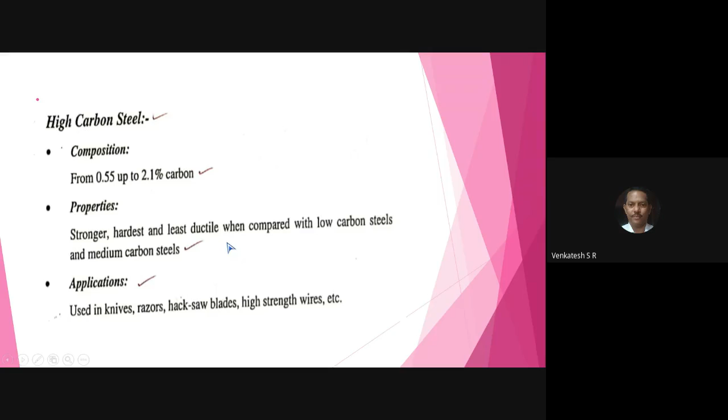Properties of chromium nickel steel. For that reason, write down properties: stronger, harder, stability, and low thermal expansion. Good weldability, corrosion resistant, corrosion resistance.

Next, write down number 3, applications. Used in axles. All of you have seen the bottom of the truck or lorry, a shaft running from the engine to the back wheel - that's the axle. Nowadays in Volvo buses they call it a multi-axle bus, because of that the shock and vibration is very less. If you use more than one axle in the truck, the shock and vibration are less.

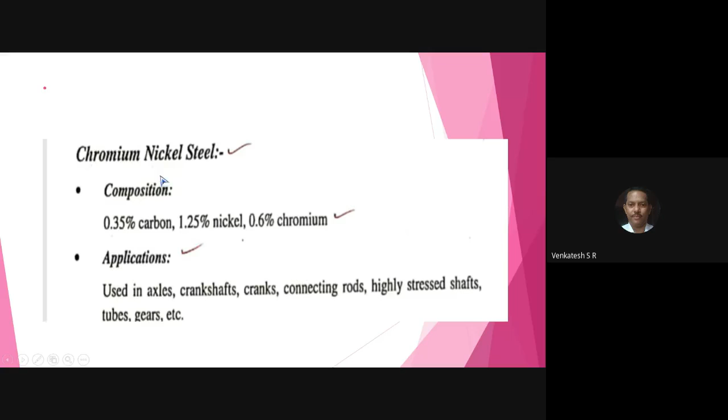Stainless steel - you have seen the shining utensils in your house. The surgical equipment used in the operation theater is also stainless steel. Nowadays, the production and manufacturing of grills, decoration purposes, furniture, tables, chairs, many applications use stainless steel. Stainless steel has a wide variety of properties, from which they produce components used everywhere. Manufacturing industries make decoration items and grills from stainless steel because of the presence of lot of properties.

First write down number 1, composition. Composition: 0.03 to 0.25% of carbon, 1 to 2% of silicon, 16 to 26% of chromium, 3.5 to 22% of nickel, and rest or remaining iron.

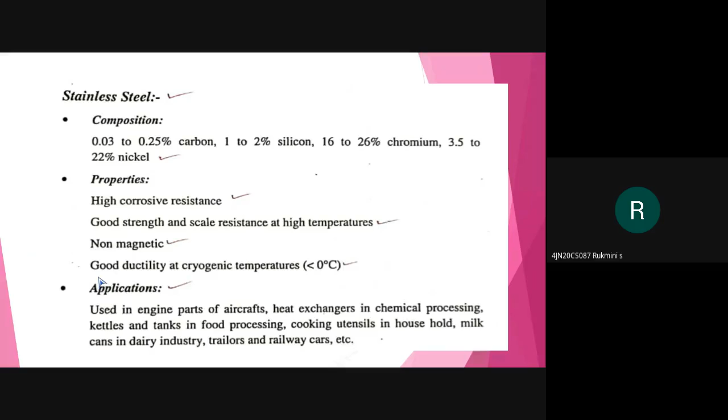Who is that? Who is that? Unmute yourself.

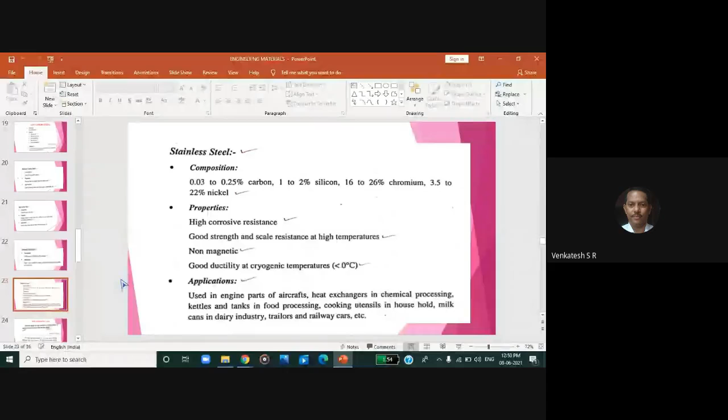Next, write down the property: good weldability. Next property, write down on the next line: good ductility and malleability, good resistance to shock and vibration.

Next line, write down number 3, applications. First application, below that write down surgical equipments. Next line write down grills production, grills manufacturing, heat exchangers, food processing, cooking utensils.

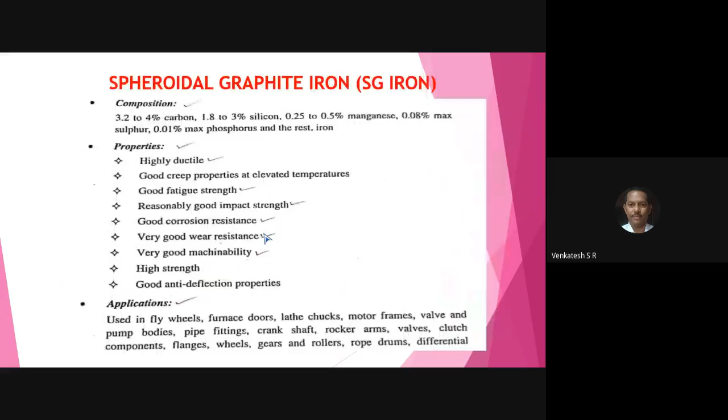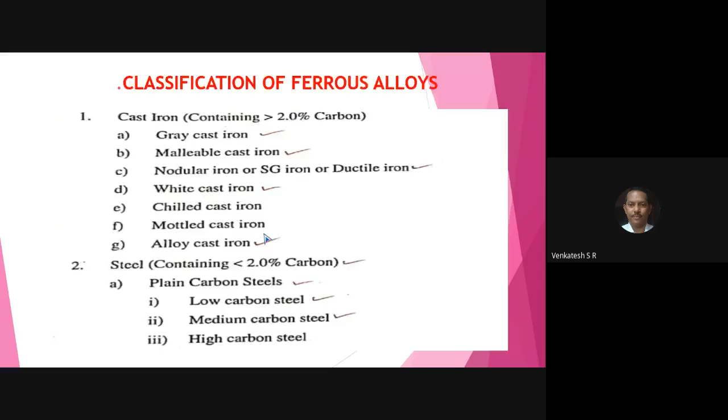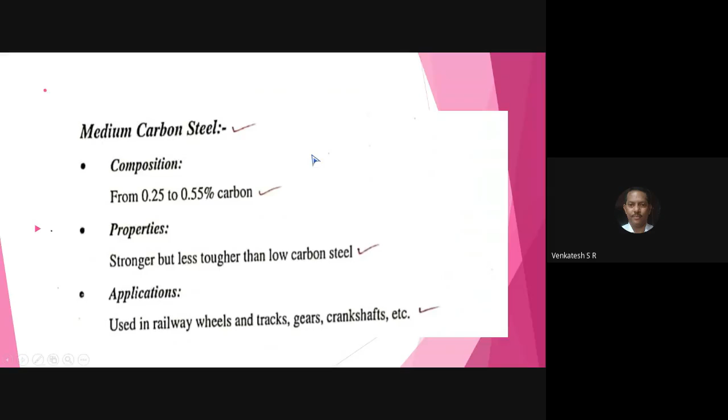Next, come to a very, very important point. Just go through the 5 types of ferrous metals. Explain briefly 5 types of ferrous alloys. We discussed gray cast iron, malleable cast iron, spheroidal graphite iron, low carbon steel, medium carbon steel, high carbon steel, chromium nickel steel, stainless steel. So you have more than 7 types of ferrous alloys.

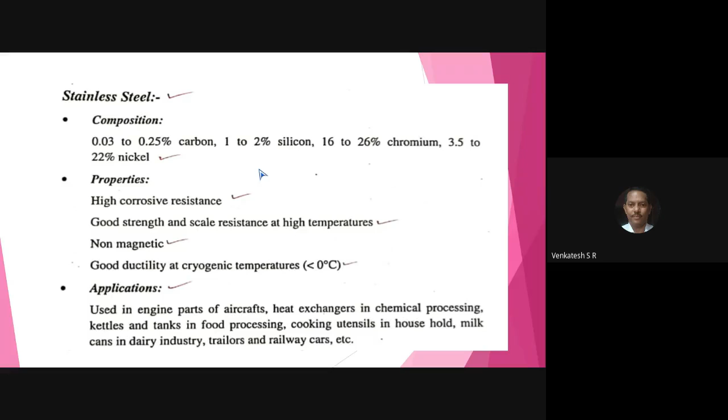In the examination, if the question is for 5 marks, write only 5 types of ferrous metals. Ferrous means what? Metal alloys belonging to the iron family. The presence of iron in that metal or alloy indicates that it concerns ferrous alloys. Ferrous means the iron family metals. You have more than 7 in the examination; write any 5. First, while writing the explanation of ferrous metals, write the title and the composition, properties, and application.

Next, come to the point. Write down non-ferrous alloys. Underline that. Write down a sentence: non-ferrous metals are a major classification of metallic materials. All metals other than iron based are called non-ferrous metals.

Keep this sentence in inverted commas and underline it. What is the meaning of this sentence? Other than iron. Start from gold, silver, platinum, copper, aluminum, magnesium, nickel, tin, lead, zinc, beryllium, titanium, cobalt, cadmium - all the metals other than iron are called non-ferrous metals.

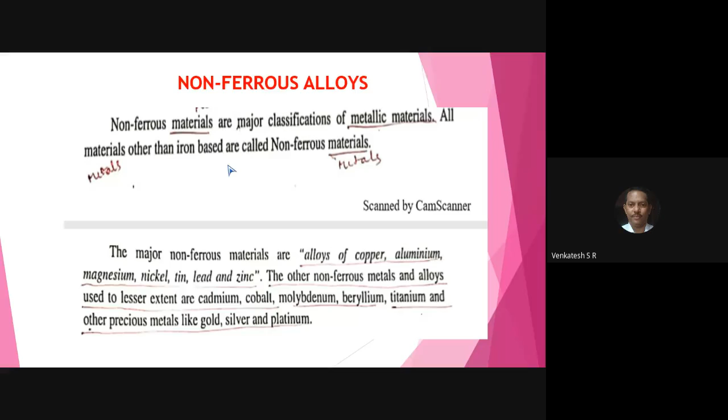Here you have more than 10. How many metals do you remember for the examination? You can write a minimum of 5, maximum any number. Come to the point: first write down copper and its alloys. Copper and its alloys.

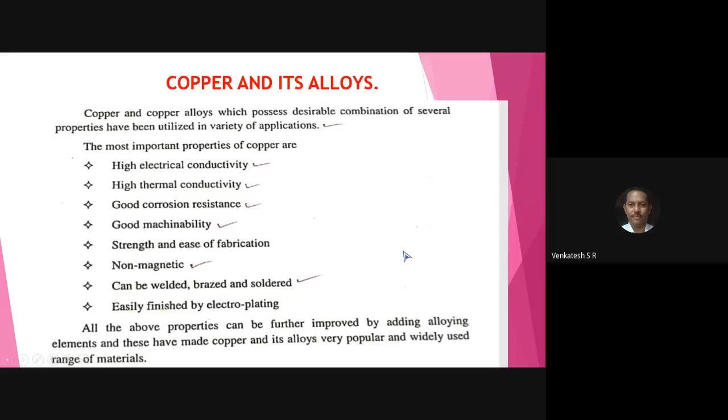First you write down copper and alloys, write the title, and go through the properties: electrical conductivity, thermal conductivity, corrosion resistance, machinability, and ease of fabrication, non-magnetic, can be used for welding, brazing, and soldering, and easily finished by electroplating. First you write down the non-ferrous alloy group.

First you write down copper alloys, underline that, put a colon. Brass: alloy of copper and zinc. Underline that, write number 1: brass, alloy of copper and zinc.

Subdivision A, write down alpha brass. Again write subdivision number 1, yellow alpha brass. Subdivision number 2, red brass. Next, write down a major subclassification: alpha plus beta brass. In that, write subdivision number 1, Muntz metal. Subdivision number 2, naval brass.

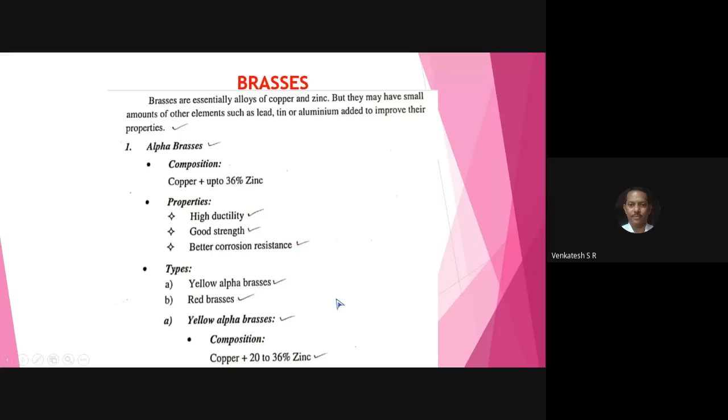Write down subdivision A, yellow alpha brass. Number 1, composition: 20 to 36% zinc, remaining copper. And properties are same, already you have properties, the same property you can write here.

Next you write down applications. Used in bullet shots - all of you have seen the bullets used in revolvers and guns, the same type can be manufactured using yellow alpha brass. Write down military ammunitions. Write down automotive radiator.

Next line, write down storage batteries, decoration light fixtures, marine engine components. Marine engine components means the ship, boat, cruise used in sea for transportation purpose. The marine engine components are usually manufactured from yellow alpha brass because of the property corrosion resistance.

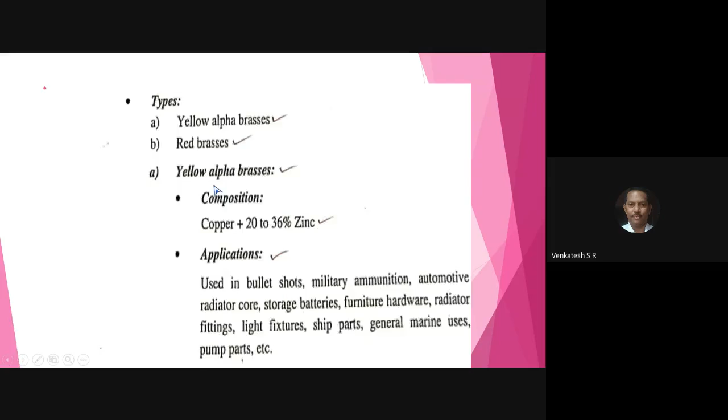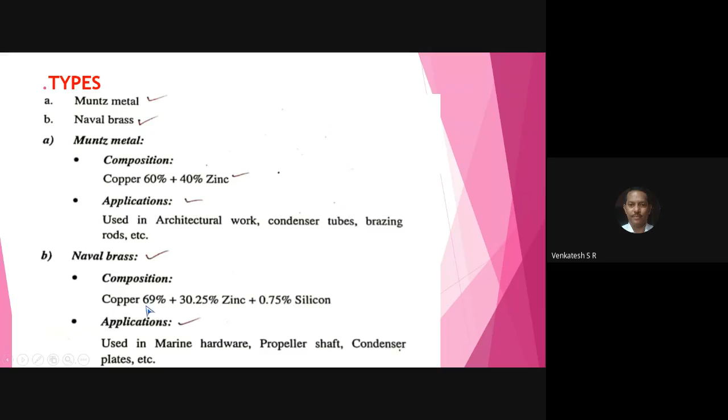So in brass, you have yellow alpha brass, red brass, Muntz metal, naval brass. In the examination, you write any one. In that one, you clearly explain the composition, properties, and applications.

Let's come to the point bronze. First, if you heard the word bronze, which component can you think of? That is nothing but bronze means bell, used in temple, church, and many applications. The major application of bronze is production of bell, production of statues, production of decoration items in temples. Bronzes are very much used in manufacturing components in chemical industries, manufacturing industries, and in dairy because of the presence of copper and other alloying elements.

Write down bronze. Bronze consists of copper, tin, aluminum, silicon, beryllium, lead, phosphorus, zinc, nickel, etc. Just see the alloying elements of copper.

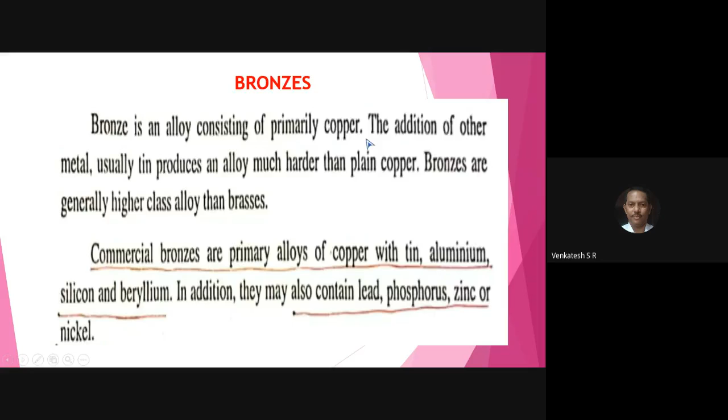Next, come to the point number 1, tin bronze. In bracket, write down phosphor bronze - it is also called phosphor bronze. Write down number 1: 1 to 11% tin, 0.1% to 0.5% phosphorus, and the remaining copper.

Next line, write down number 2, properties. The drawback of bronze is that it is very brittle, very brittle. It has very low impact strength. It is very brittle, but used in many applications.

Number two, properties, write down one by one. High strength. Number two, high toughness. Number three, low coefficient of friction. Number four, free from season cracking.

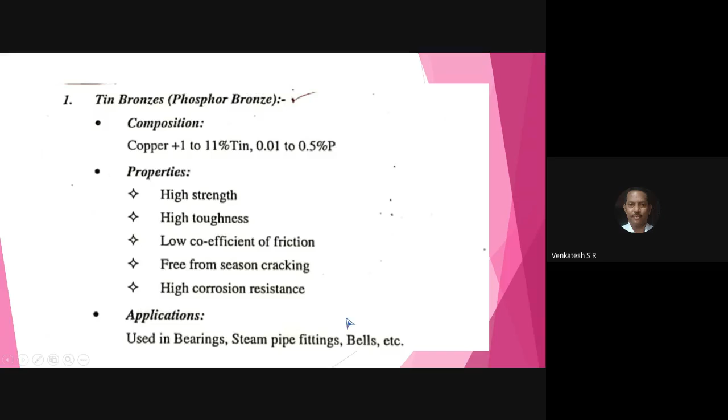Next, the silicon bronze. Number one, write down composition: 5% of silicon, remaining copper.

Number two, properties: high corrosion resistance, good mechanical properties. Next, write down number three, applications.

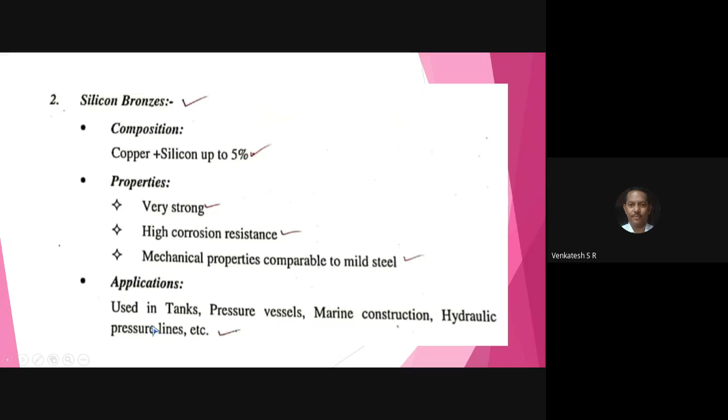Applications: used in pressure vessels, used in tanks, marine engine components, components of hydraulic circuit. All of you have seen Poclain and JCB used for construction purposes, making of holes, digging of lines - that's hydraulic circuit components. So silicon bronze also has very good applications, these you can write for silicon bronze.

Next, come to the point, aluminium and its alloys. If aluminium - you might have seen the electrical wire used for giving electrical supply to your house through the service mains. In the service mains you have two parts, one is phase, other is neutral, used for making electrical components and other items.

The following properties are commonly available in aluminum and its alloy components: high electrical conductivity, thermal conductivity, resistance to corrosion, highly ductile so it can be drawn into wire, malleable so it can be made into sheets, non-toxic, good machinability, and you can produce any shape and any size.

Next, write down aluminium copper alloy. Number 1, aluminium copper alloy, this is also called duralumin. In bracket, write aluminium copper alloy, duralumin. Underline that.

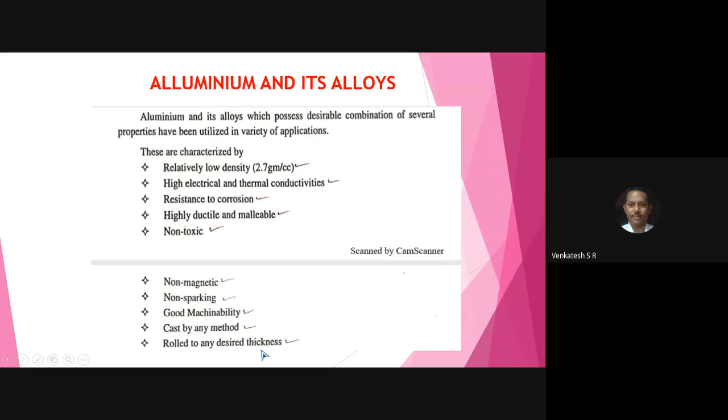Good machinability, cast by any method, any size, shape, and dimension, and can be rolled to any desired thickness. So these are the properties available in aluminium and its alloys, for that reason it is used in electrical equipments, conductors, and other electrical items.

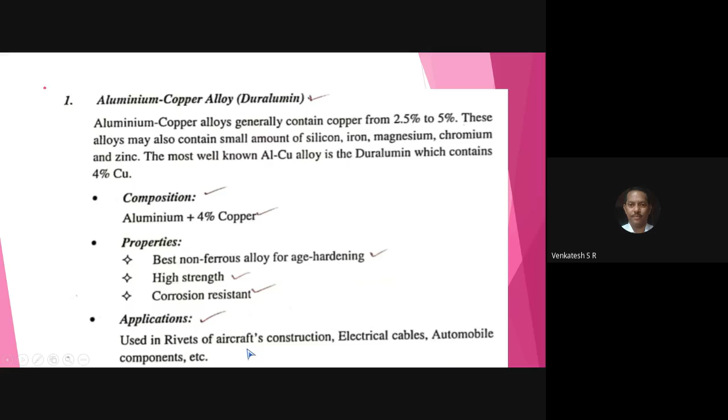First, write down applications: electrical cables and other components, automobile components. Next, used in rivets - all of you have seen joining of two sheets using rivets. Used in rivets of aircraft, etc. Next, write down number 2, aluminum silicon alloy.

Aluminum silicon alloy. Write down composition. Write down aluminum silicon alloy. Next line, write down LM6.

LM6. As I told you earlier, the electrical component, electrical cable, and other components of engine, car, truck, which are manufactured from the metal LM6. LM6 means the widely used component of aluminum silicon alloy. It has excellent properties, for that reason used in components of car, truck, and other automotives.

Write down number 1, composition. 12.5% of silicon, and remaining aluminium.

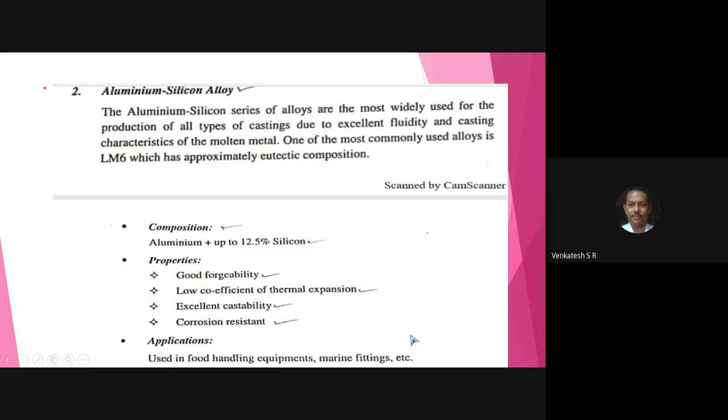Next, you write down aluminum zinc alloy. First, write down number 1, composition. 5.6% of zinc.

Plus 0.6% of magnesium, 0.5% of chromium, 0.2% of tungsten, and remaining aluminum. Write down number two, properties.

Write down one by one. Good castability. Number two, good machinability. Number three, good corrosion resistance. Good ductility and malleability.